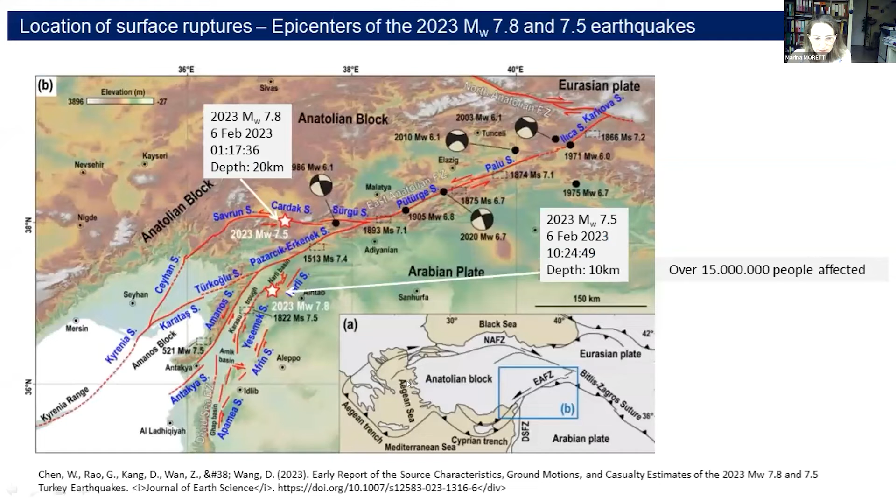I will share with you my basic observations on the consequences of the two devastating earthquakes of February in Turkey on RC buildings. At the time of our visit, most of the debris of the severely damaged and collapsed buildings were removed, owing to the admittedly remarkable efficiency of the Turkish authorities.

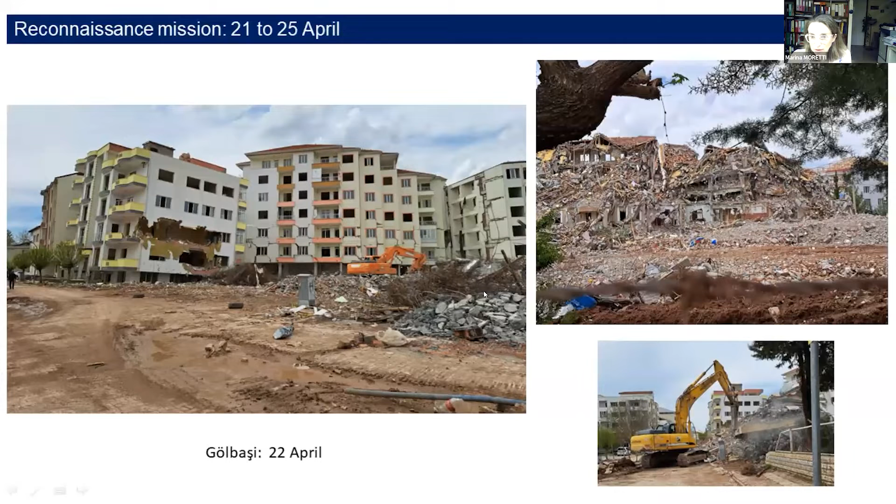Some constraints in the results I'm going to present are that buildings were inspected externally as a rule. Plots and details of the structures were not available, and in general the period of construction is unknown.

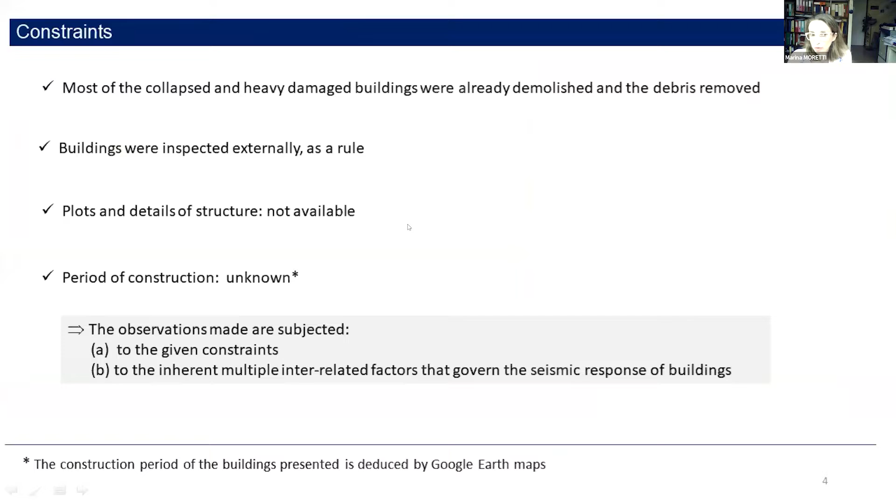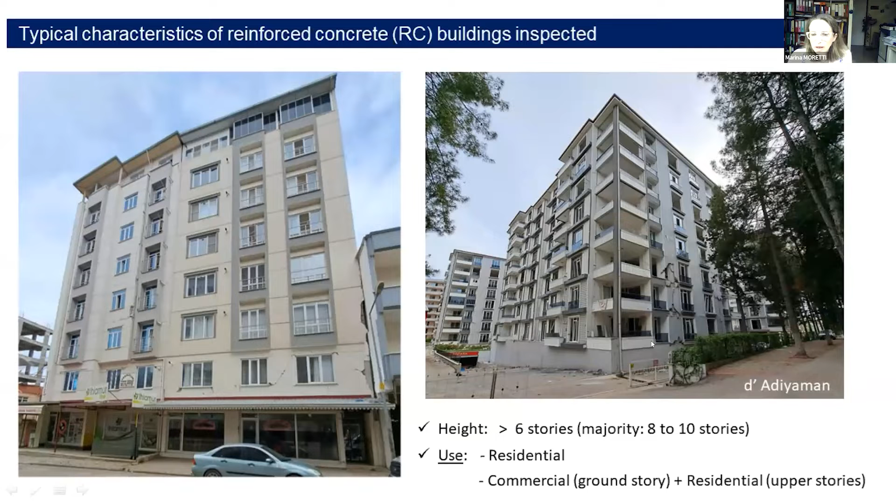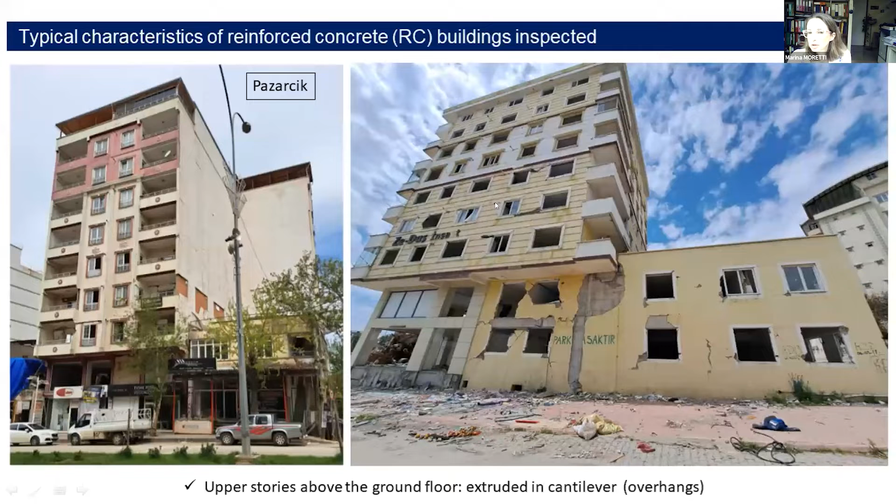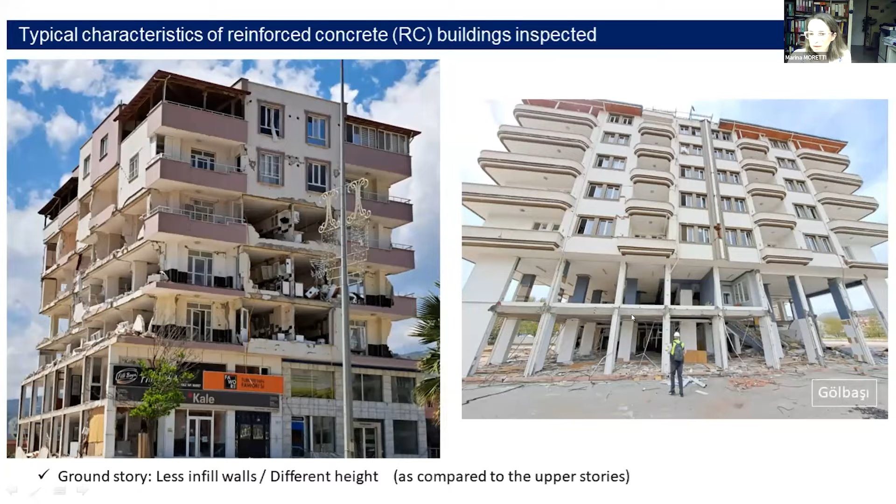Now, typical characteristics of the buildings inspected: the height is over 6 stories, the use is residential, and some buildings have commercial use in the ground story. Some buildings are constructed in cantilever, extruded above the ground floor. The ground floor is usually, in some cases, less stiff than the others because it has less infills and also increased height compared to the upper floors.

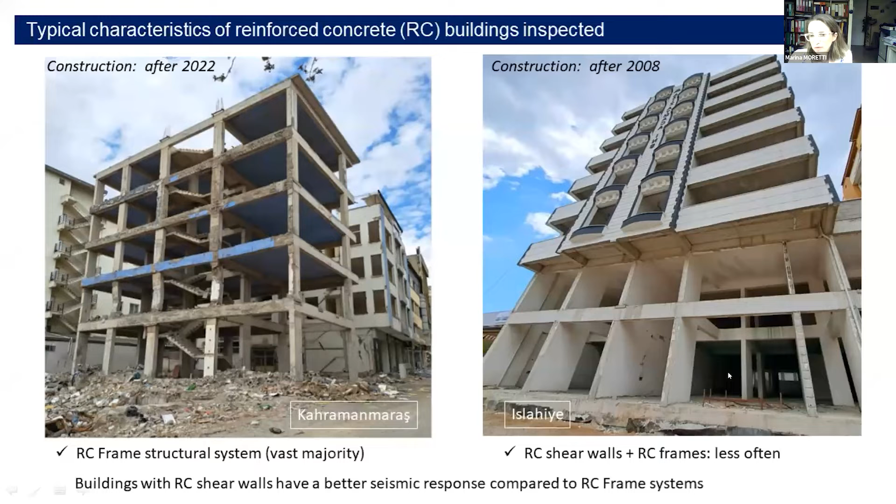Reinforced concrete frame structural systems are generally adopted. We observed only a few shear walls compared to frame systems. Flat slabs are a construction system often encountered, either solid slabs or waffle type slabs.

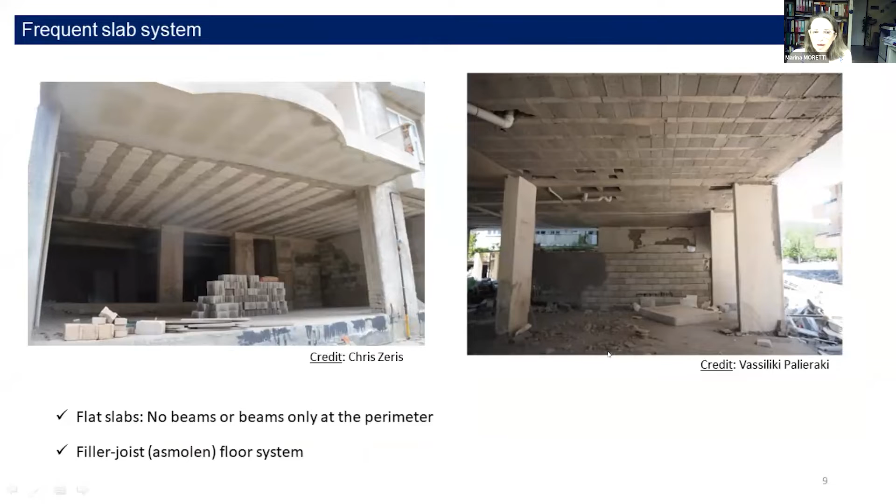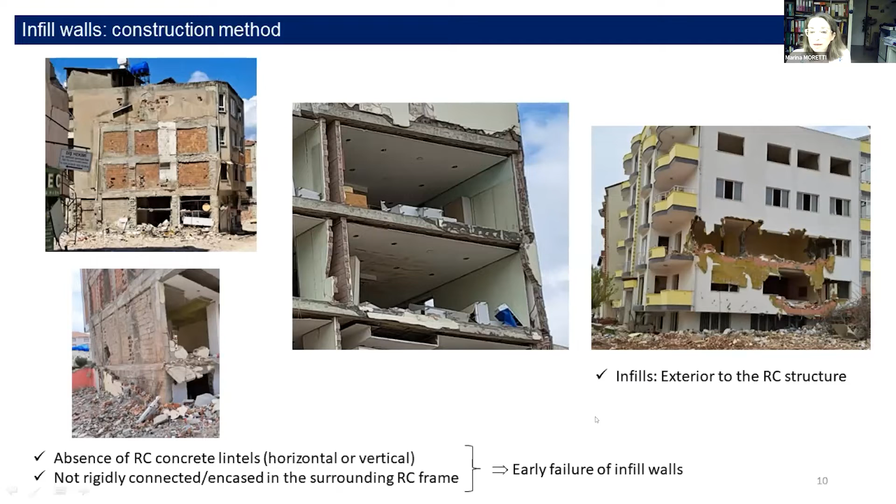Another observation concerns the construction practice used in the infill walls. Either clay masonry was used, and in some cases, also cement masonry units were used in that part of Turkey. However, the connection with the reinforced concrete structure was not attempted, and absence of lintels was observed. In some cases, even the infills were built completely exterior to the reinforced concrete structure. This resulted in early failure of the infill walls.

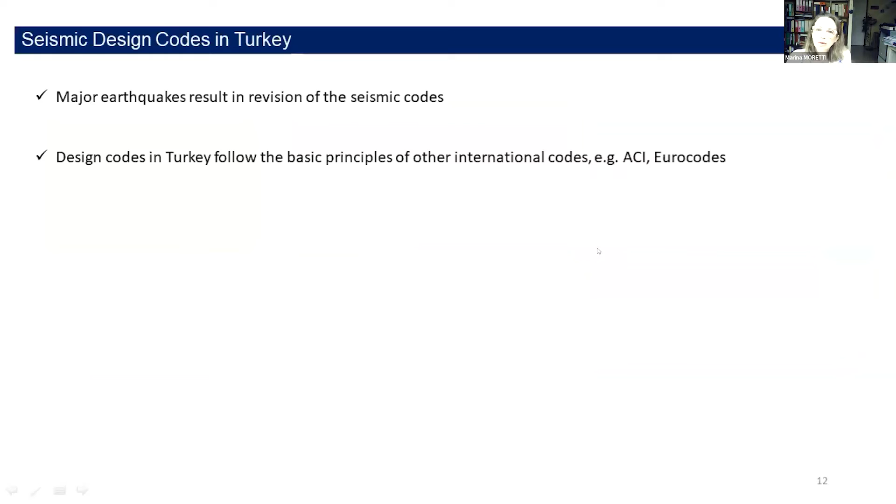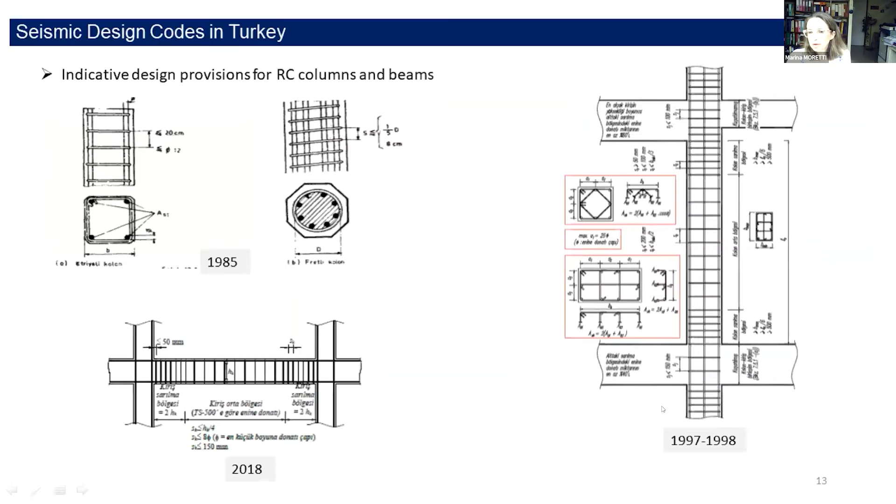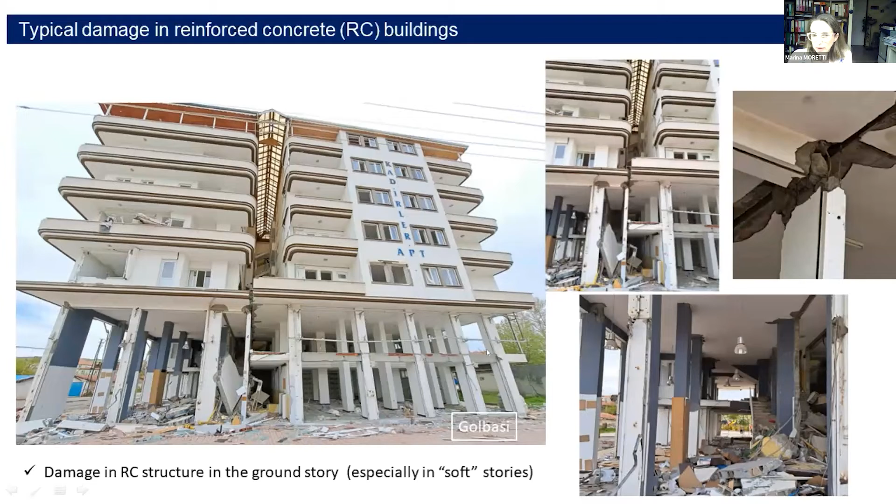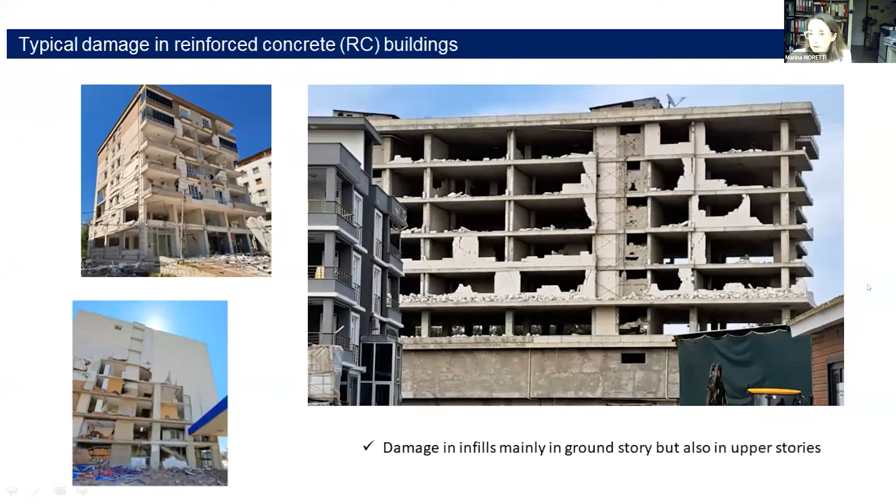Now, some typical comments on typical damages of individual structural elements. In general, damage in the reinforced concrete structure, as is typical in other cases, occurs in the ground story, especially when the ground story may be considered a soft story. Damage in the infills is also more intense in the ground story, but was also observed in higher stories because the infill wall was not well connected to the reinforced concrete frame.

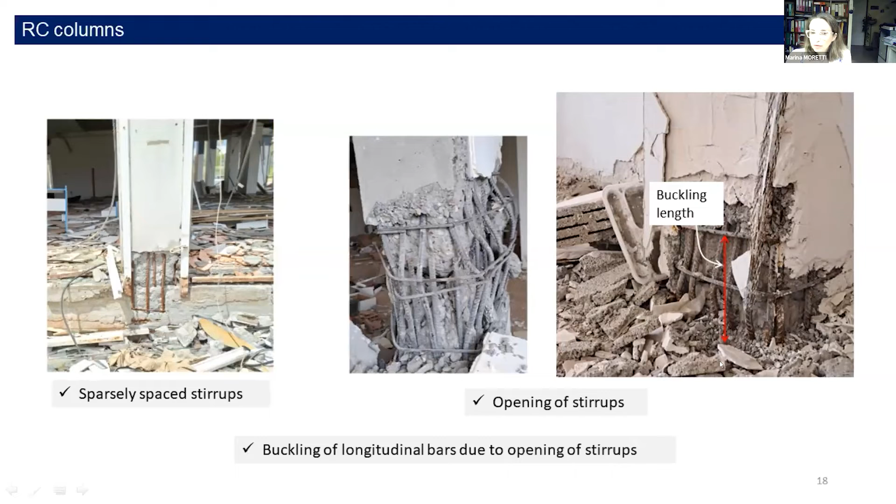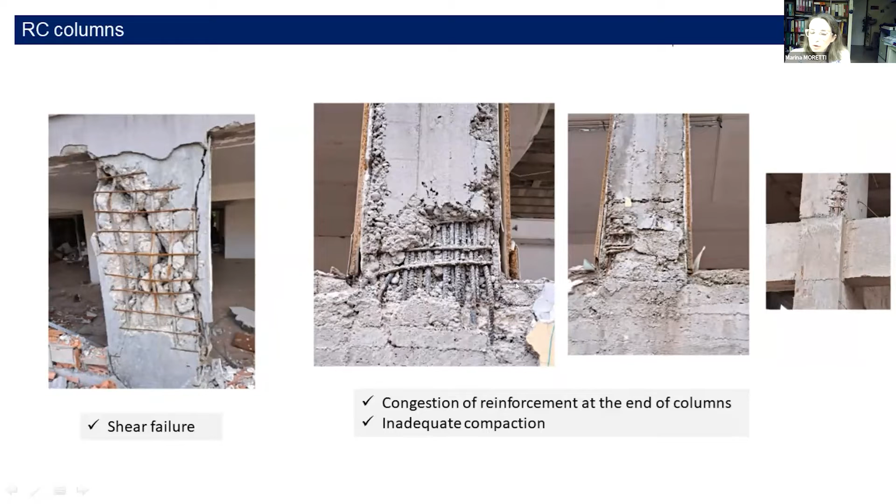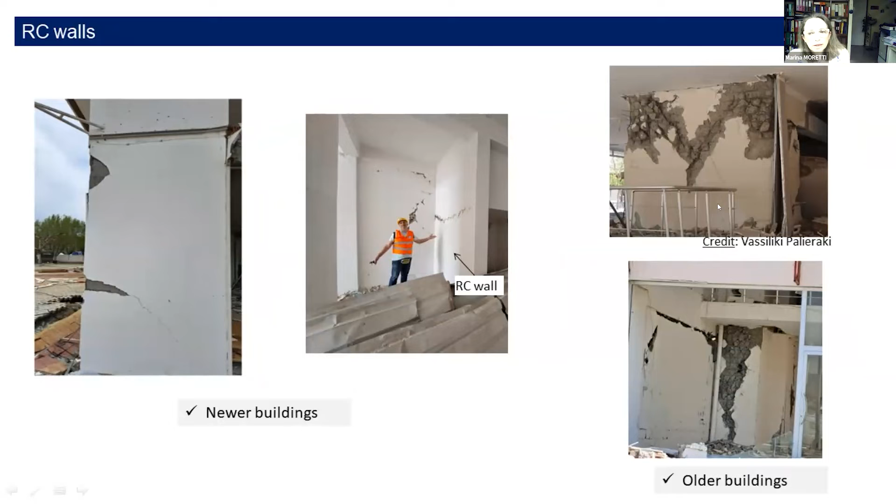Now, damage in reinforced concrete walls: not much damage was observed in shear walls in newer buildings, contrary to older buildings, perhaps owing also to lower concrete strength.

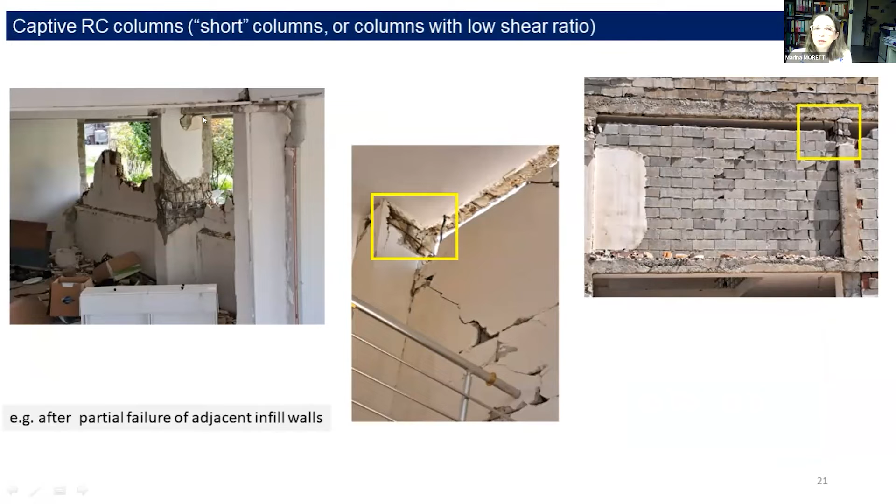This is damage that occurred subsequent to the failure of masonry walls, because the part of the column revealed behaved as a short column and shear failure occurred.

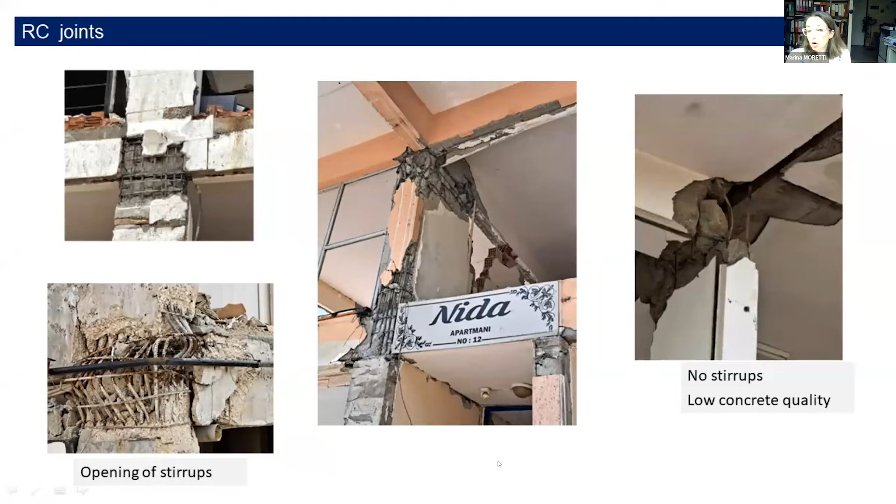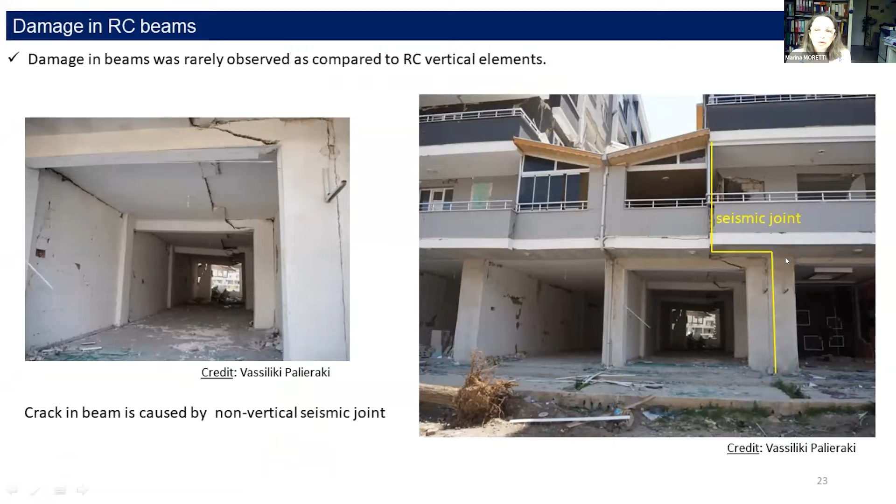Damage to beams was not often observed, and when it was observed, it was attributed to reasons different than flexural failure. This type of failure in beams was caused by a seismic joint which crossed the beam, where the joint was not vertical.

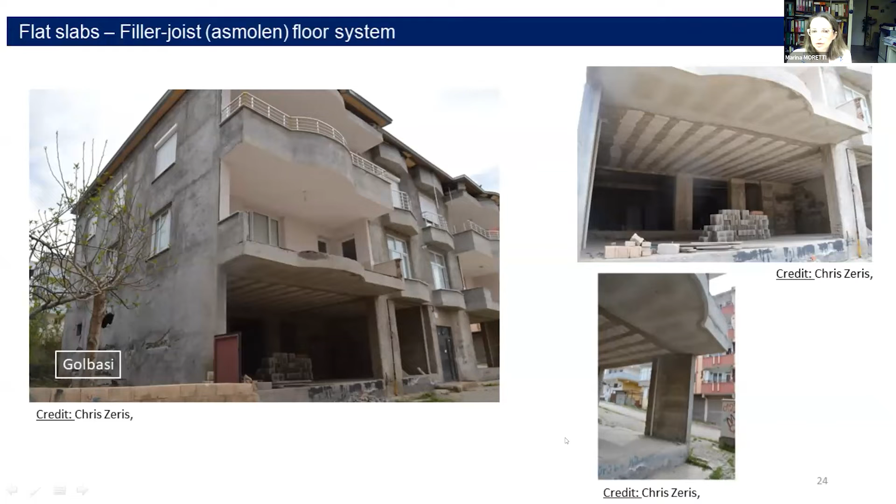Now, some comments on the behavior of flat slabs. This building in Gölbaşı had flat slabs, this filler joist or waffle slabs, which behaved very well, showing no damage after the earthquake.

In some cases, however, these types of slabs result in large deformations in the slabs. Also, in cases where not adequate lateral stiffness is provided in the structure, because no beams are present, failure at the top ends of the columns may occur.

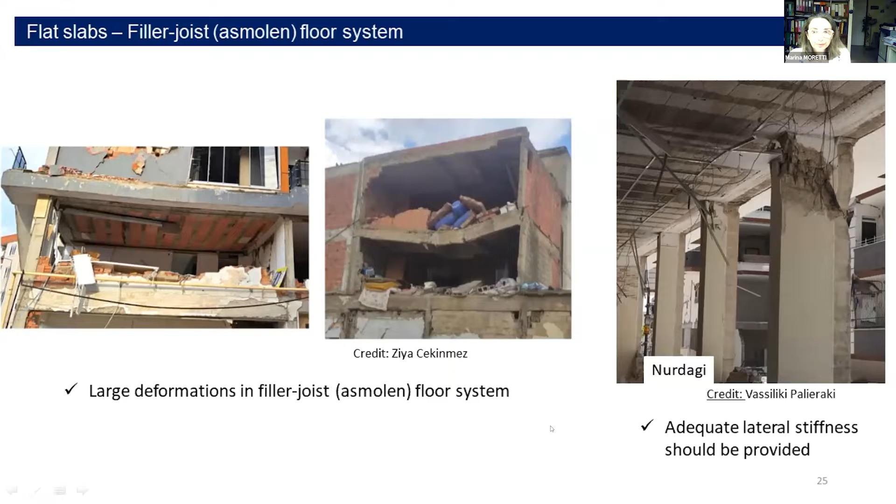Now, this is an interesting example of a failure of a building with solid slabs. It was one of the few buildings that had collapsed and were not removed at the time of our visit. All the columns were situated with their weak direction facing the load, so they were weak.

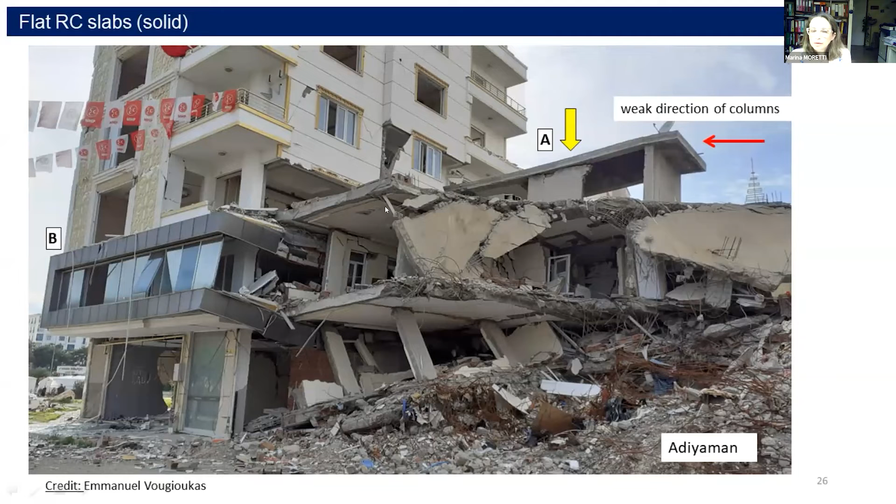They were weak in the direction parallel to the earthquake, which resulted in collapse of the building, and the collapse of the building resulted in serious damage to the adjoining building.

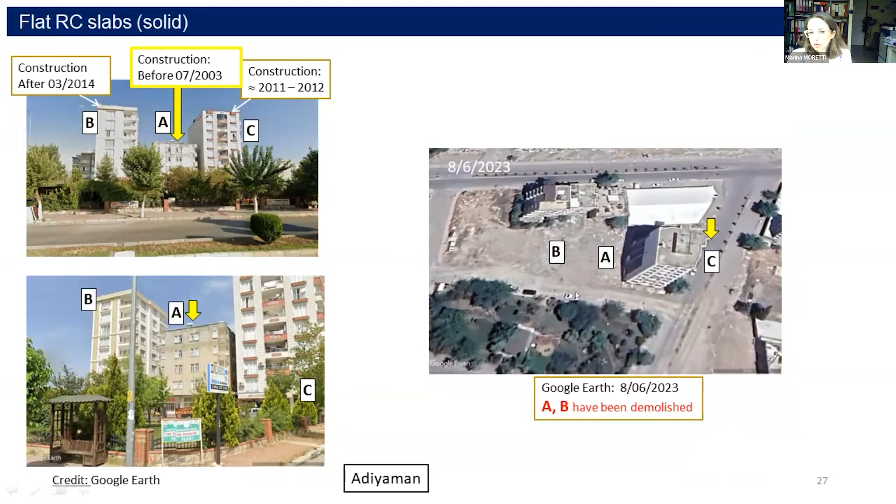This building is building A, this is building B. We can see that although the distance between A and B was significant, there was a road here between the two buildings. Both buildings were removed according to this picture on Google Earth. Now, some comments regarding the global behavior of buildings.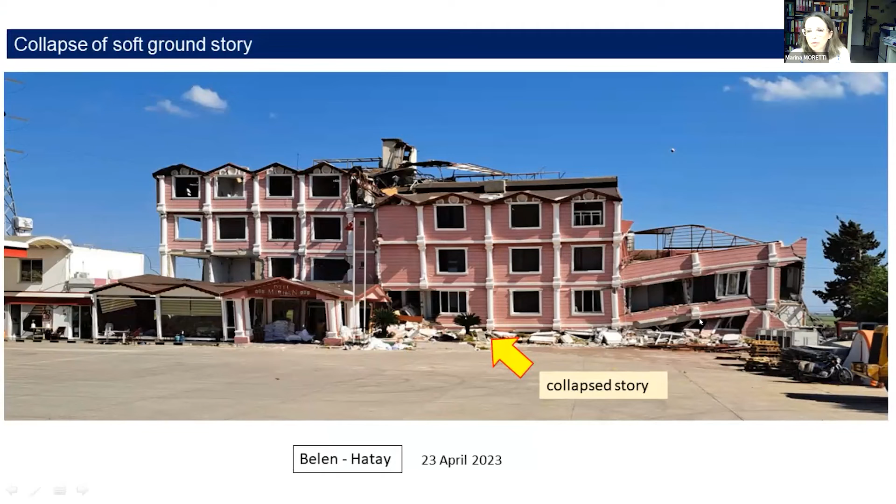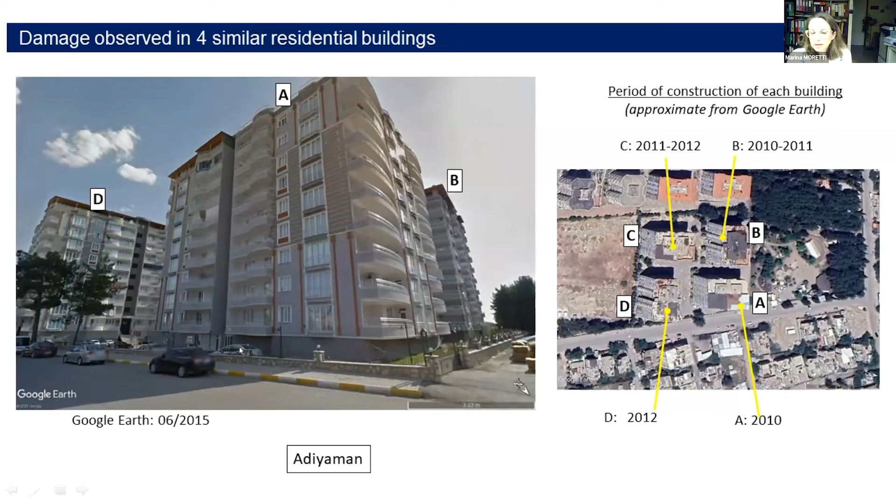Here is an example of four similar buildings in Adıyaman, A, B, C, D, constructed at more or less the same period. All buildings had masonry infills at the ground story. However, after the earthquake, practically all masonry infills at the ground floor were damaged, and as a result, damage was observed in the columns of the ground floor.

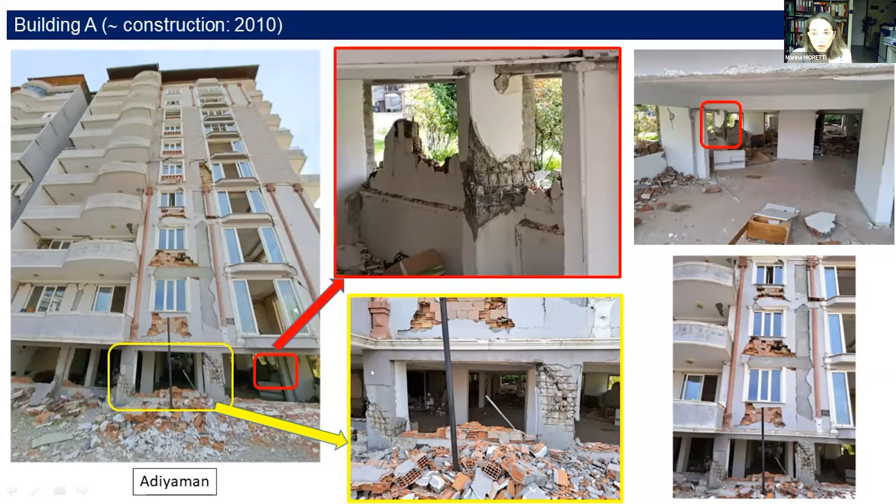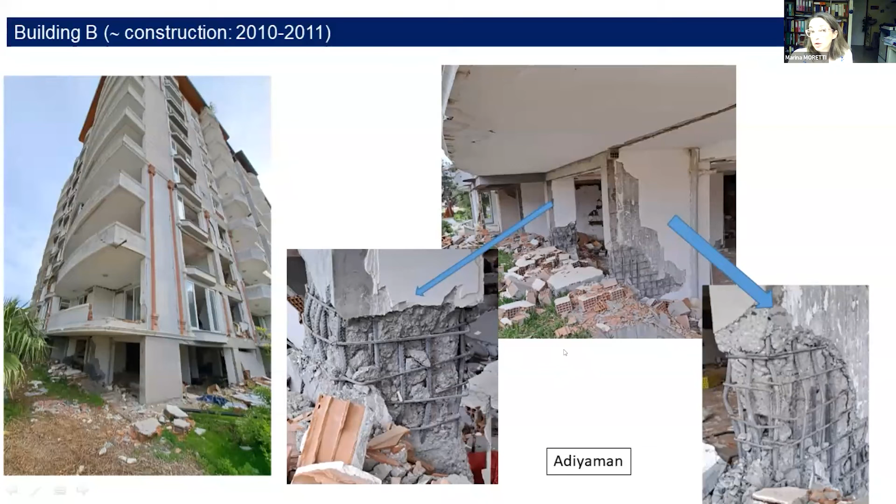In buildings where shear walls were present at the perimeter, the extent of damage was less. So the importance of masonry walls as a non-structural system, but capable of resisting lateral forces at the first stages of an earthquake, is important.

Now this is another complex of buildings in Adıyaman. This, I think, is the photo in the program of this webinar - partial collapse of one of a six building complex. One of the buildings showed a partial collapse. This is the same collapse but from the back part of the building.

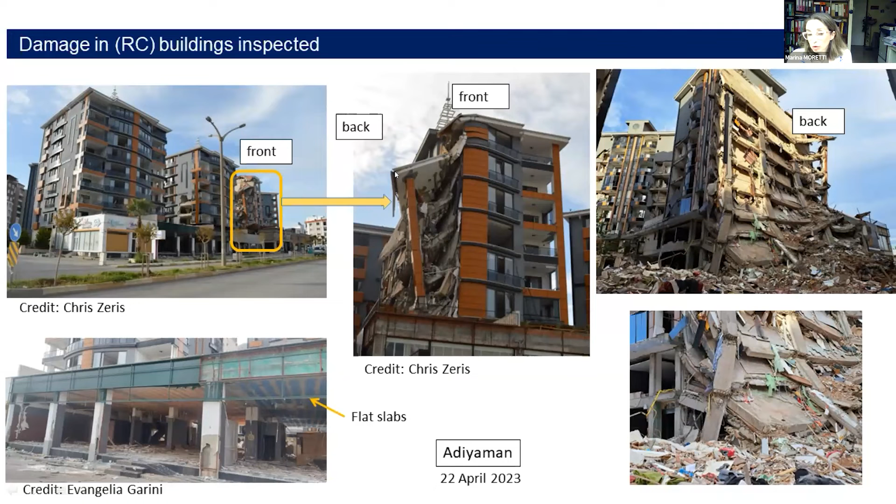Now these buildings had a flat slab system. This may not be the cause of the collapse, because similar buildings - only this building had serious damage and collapsed, while other buildings behaved well.

Now here is the plot. The buildings were constructed after 2015. And here is the building which had this partial collapse - it was demolished before June 2023.

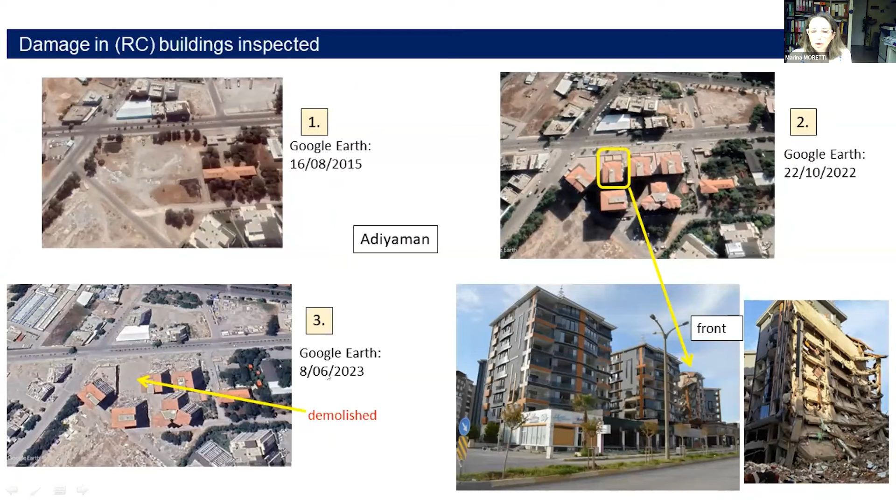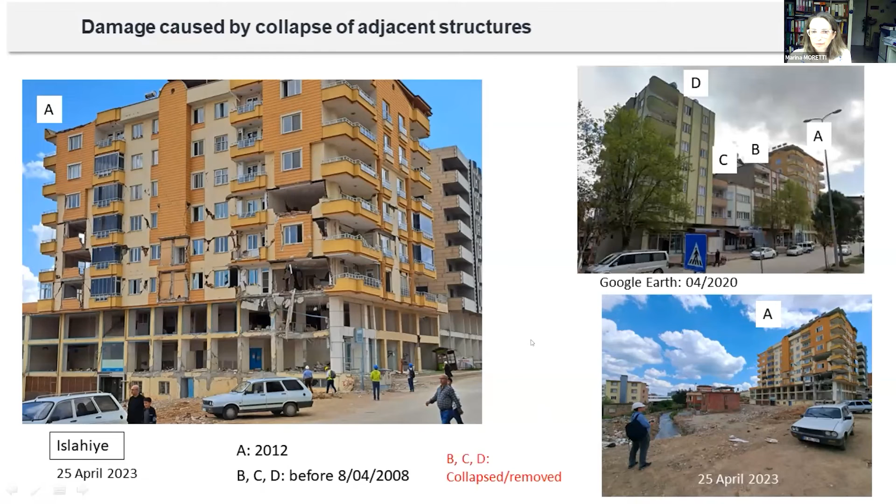So this is at the time of our visit, but before the earthquake occurred, three buildings were present on the left of this building. Here is another building in which the slabs were crushed because of the collapse of the building in front.

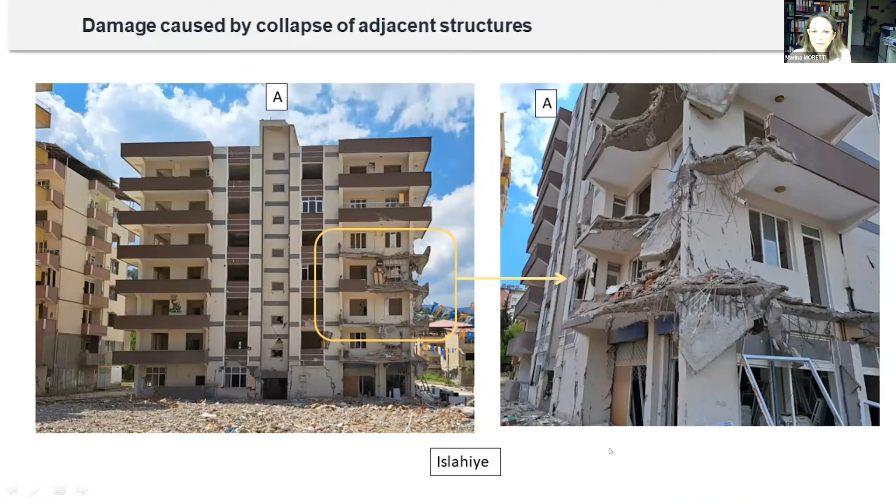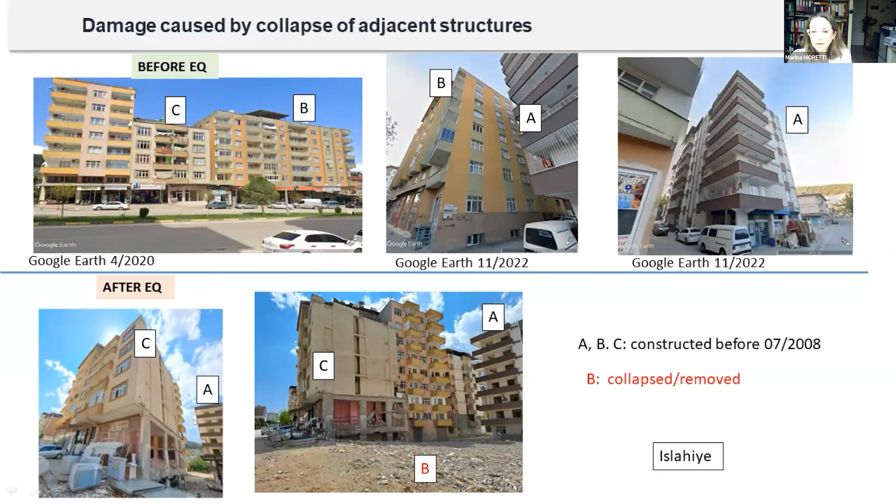This is building A. Building B collapsed. Although the distance - you can see there's a road here between the two buildings - this building collapsed, fell here, and crushed the slabs of building A. And here is building B, the part of building B, and building C, the remaining building.

Finally, this is another case of a building which was constructed before 2008. It has a regular layout in height and in plan, and no damage along these faces. But here we have damage, caused by the collapse of adjacent buildings.

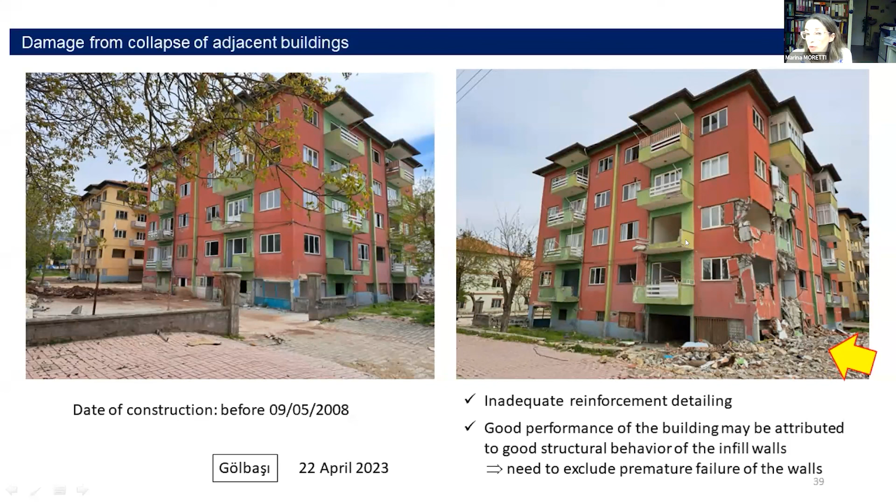What is interesting is that the detailing of the reinforcement of the concrete members here was very poor, with sparsely spaced stirrups and not particularly good concrete strength, as we can observe. However, the masonry walls stayed in place. So the good performance of this building, despite the great impact when the other building fell on it and caused this damage, may be attributed to the resistance offered by the infill walls.

And here is this building, I think building A, building B and C. So buildings B and C collapsed and caused this local damage to building A. And here are the damaged buildings B and C.

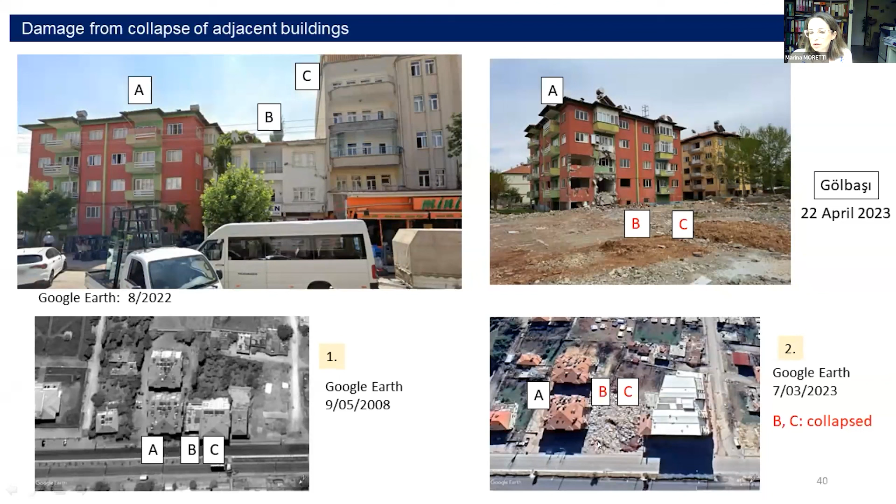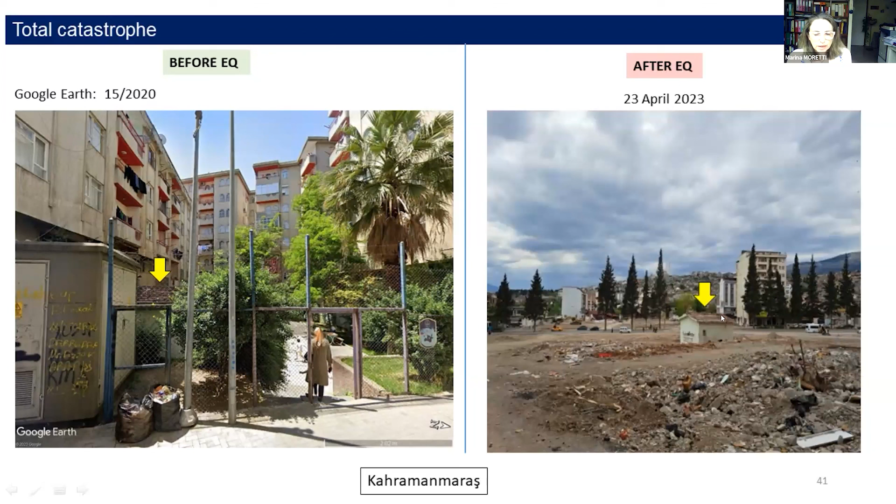To conclude this presentation, I would like to show you a picture of how a lively neighborhood in Kahramanmaraş was before the earthquake, and what happened. What is the picture after the earthquake? The only building standing is this small building here.